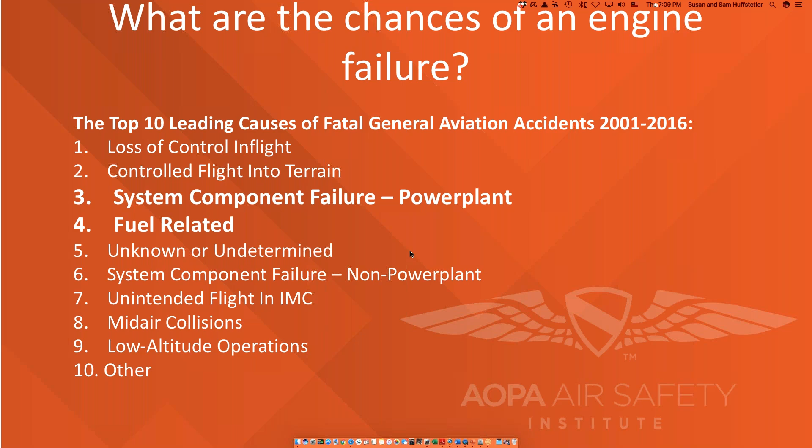Now, we always want to make sure we stay away from running out of fuel, because there just aren't enough words in the English language to describe why you ran out of fuel. So let's put that to bed and talk more about what happens when you lose that engine. Again, how often does this happen?

Well, this comes from the 2019 NALL report, which looks at aircraft accidents through about 2016. As you can see, about 72% of all accidents are pilot related, but about 18% of accidents are mechanical or unknown. Our fuel and power plant failures are listed in that 17.9% mechanical number.

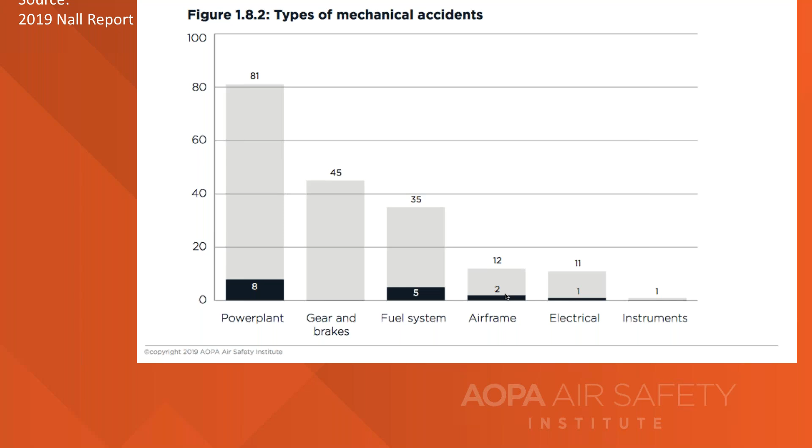Let's go back and look a little more in depth. Again, from the NALL report, we look at the types of mechanical accidents, and under power plant we have about 81, and the fuel system about 35. Put those together, and out of 1,214 accidents in 2016, about 116 were due to power plant or fuel system issues. That's about 9.5% of all accidents.

Now, the reason it's very difficult to come up with these numbers is that not all engine failures are reported. They do not meet NTSB Part 830 reporting requirements unless there is substantial damage to the aircraft, a personal injury, or if it's requested by the NTSB.

So that's one reason we're looking at this poll, to see just how many people of this group have had these accidents. Now, on this slide you also see the ATSB acronym, which stands for the Australian Transport Safety Bureau.

They do a lot of research on aircraft safety, and their numbers in 2016 came up with basically 13 failures per 100,000 flight hours within the Lycoming and Continental grouping of engines, 15 per 100,000 for the Rotax. If you fly experimental aircraft, you're familiar with the Jabiru engines—they have a much higher failure rate. I don't have that number on screen, but it approaches 30 per 100,000 flight hours.

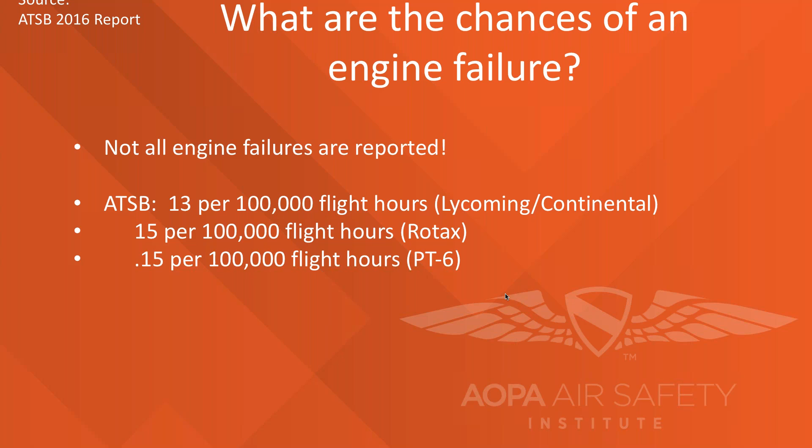But if you're happy and lucky enough to fly behind a PT6, it's bulletproof—the thing only fails 0.15 times per 100,000 flight hours. So if you have about 800,000 dollars, you're in good shape, you can go buy a PT6.

So what happens when you do have that engine failure? Well, it is human nature to be startled, and there is absolutely nothing you can do to train yourself away from that startle response. You can train what happens after it, but that startle response will stay with you regardless of how much you try to plan for it.

It's really interesting that when I was doing research for this project, I went through the NASA databases, and they have a ton of research on the effects of sound and sudden sound on astronauts and how that causes stress and startle responses. In our case, it's the lack of sound—that engine has gone to pot, you have no engine noise in front of you, and now you've got to deal with it.

I found this quote within the NASA study on response times very interesting: if you've been conditioned during training to expect to find a good landing area, and you startle yourself with an engine failure, you are now startled as you approach the emergency process, and you're very likely to ignore all the airmanship you've ever learned to avoid aircraft damage. And aircraft damage really is very likely.

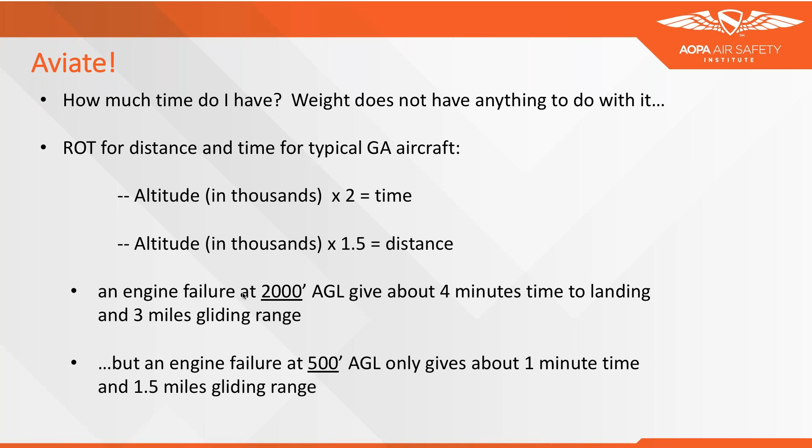And keep in mind that while you might have 5 minutes of time while you're gliding, that last minute is going to be filled with aviating. You're not going to have a whole lot of mental bandwidth in that last minute to do very much other than concentrate on your landing area and make sure that you land correctly.

Most aircraft flight manuals or pilot operating handbooks have these charts, and they simply show a quick illustration of what we were just talking about in terms of your altitude and the amount of distance that you can glide and the time that you might have. Your particular aircraft may have a slightly different glide ratio, which is why you want to take a look in that chart.

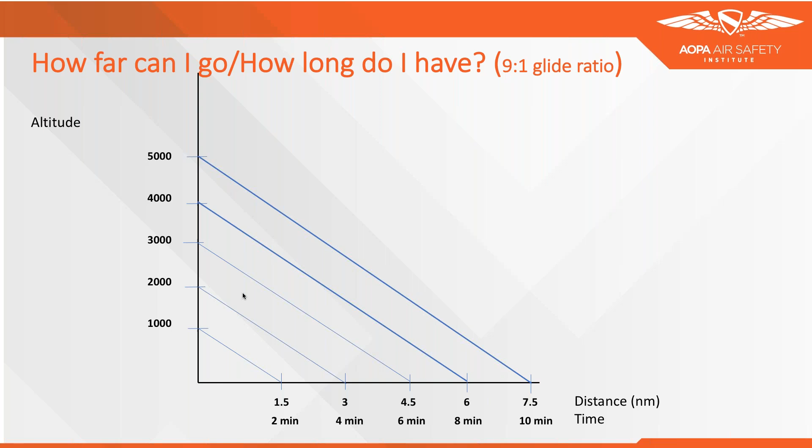So what happens if you don't have much time? I teach my students that if you have 1,000 feet of altitude or less below your fanny, then it's time to concentrate on landing the aircraft. So again, you're going to pitch for that best glide speed and trim the aircraft.

You're going to pick out that best landing site and stick with it. You need to stick with that landing site because changing it puts in too many variables. You don't have many engine restart options available because of the time. If you have some extra bandwidth, you might be able to swap tanks or turn on a fuel pump, or throw on carb heat, but otherwise your basic option is to secure yourself and the passengers. Maybe communicate a quick mayday if possible on the frequency you're on, and then, critically, before you touch down on any surface, slow down to a reasonable but minimum controllable airspeed prior to touchdown.

Okay, what happens if I'm above 1,000 feet? In this case, I have time and brain cells available, and I'm able to figure things out. I'm going to pitch and trim the aircraft for the best glide possible, take a preliminary look to see where I can put the aircraft down, and turn in that direction. I'm going to use my visual acuity or the nearest function on my avionics to determine where I might be able to take the aircraft and see if there's a runway somewhere close. In this case, you might also need to throw in a Mayday call and advise ATC of your problem before you go through the restart process.

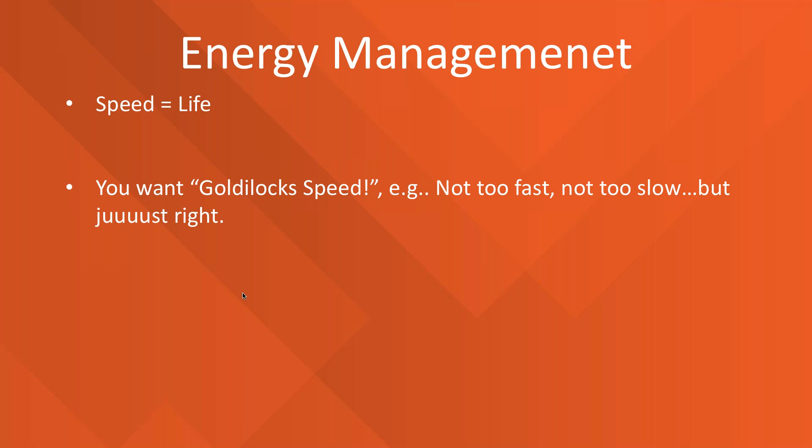Now, we talked about landing under control, and in my previous life as a fighter pilot, we used to say speed is life, because you had to have a certain amount of speed to fly the airplane against the opponent and maintain your energy. In our case, you want the perfect speed that allows you to land at just over your minimum controllable airspeed, so you can dissipate your energy in a very controllable fashion.

So your best glide speed, once you have an engine failure, is not your best impact speed. It is the best speed that will give you the best distance while descending without power. So if you slow down, that's not going to make you go further toward another airport.

It's merely going to slow your descent, but you'll go a lesser distance. Now, how heavy you are also does not determine how far you go. It does determine your angle of attack, and more likely your actual best glide speed.

Most of us use a single speed to determine your best glide speed. So for all practical purposes, let's just drop weight out of the consideration, except to know that weight does impact stall speed. We'll talk about stall speed and its relationship to your touchdown speed in just a moment. You should know what your minimum controllable airspeed is above a stall with the power off. If you don't know that, go out and practice it next time.

You need to know that when your speed is doubled, your energy is quadrupled. So what this means really is that your total energy that has to be dissipated by your aircraft and by your bodies inside that aircraft is a function of the square of your airspeed.

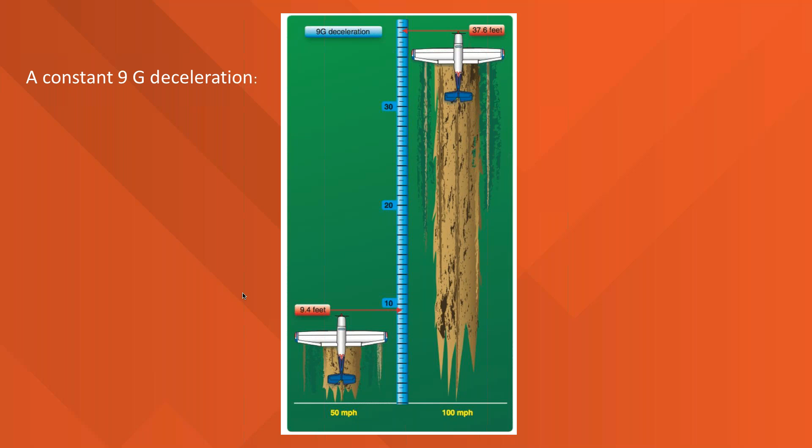So what does this really mean? It means that if you are in a 172 and the aircraft is gliding at 65, but it stalls at 50, let's assume you're going to slow to 55 before you touch the trees or the bushes or just the grass out there. If you slow down to 55 knots, it reduces your overall energy by 28% than if you were still maintaining 65 knots.

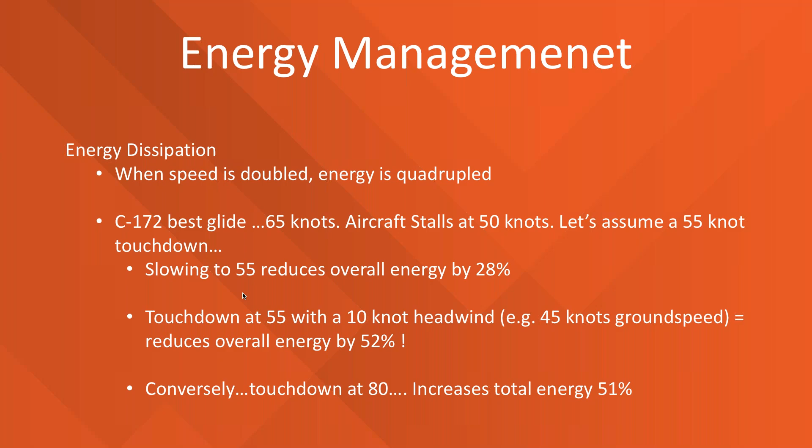So if you touch down at 55 knots with a 10 knot headwind, which is easy to see, that gives you a 45 knot ground speed. It reduces that total energy by 52% from that 65 knot no-wind glide. Now, the other way is if you touch down at 80, maybe downwind, maybe a little fast, that increases your total energy by half, and that is unacceptable.

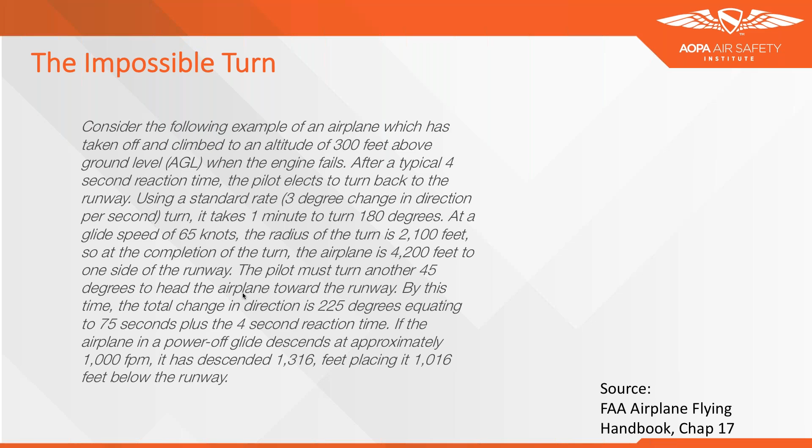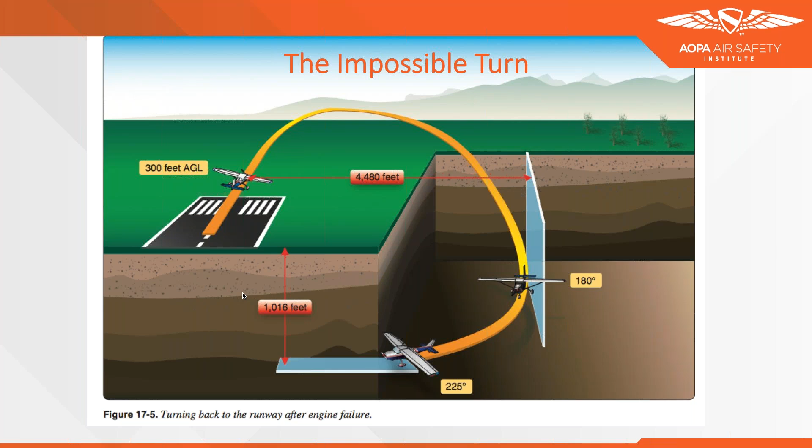Here's the description from the FAA Airplane Flying Handbook, and it's a little laborious, but essentially it means that if your engine fails at 300 feet above the ground, after a 4-second startle time, the pilot elects to turn back using a standard rate turn. Well, if he does this, the aircraft descends without power and impacts the ground before you ever make the 180-degree mark. So that impossible turn, under those conditions, would lead to tragedy. But clearly, there is an altitude and an airspeed from which you may elect to return to the airport.

So what's the turn radius at other bank angles other than a standard rate turn? How much turn is required to get back there? And how much time does it take? Well, let's take a look at that.

Now, I ran the numbers, and I'm not going to go through the math in public here, but at a 30-degree bank, it gives you a 650 foot turn radius, and it gives you a turn rate of about 10 degrees per second. And it takes, as you see, 24 seconds to turn back 240 degrees. As you saw from that last slide, if you turn 180 degrees in this situation, you're not going to make it back to the airport environment. You have to turn further than 180 degrees to actually make it back to either the runway or the clear areas surrounding the runways at an airport.

If you go to 45 degrees bank, the radius obviously decreases. Again, not quite a linear function, but it's about two-thirds of what you had at a 30-degree bank.

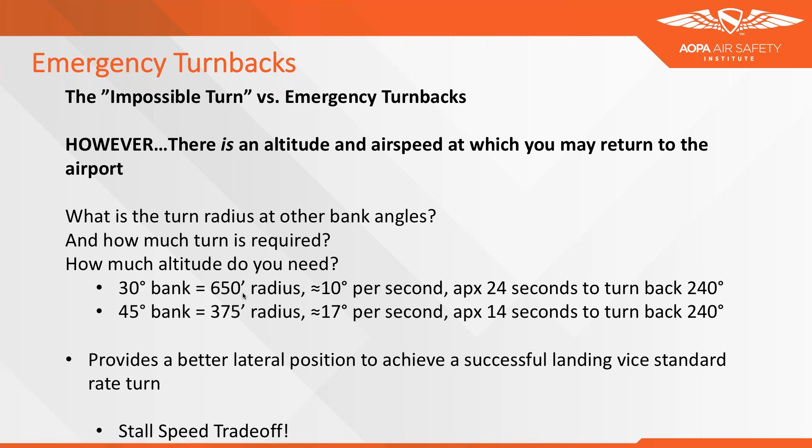And it gives you a possibility of getting back to that airport. Remember, at 30 degrees of bank and 160 knots, a 747 is going to have the very same turn radius as an RV-6. So this is not aircraft dependent, it's just dependent on your angle of bank and your airspeed. So we know that altitude and speed are critical.

So really, what angle of bank and airspeed should you use for this emergency turnback? Well, we thought about the angle of bank, but what's going to happen to your airspeed with that increased angle of bank? Now, no math in public, but the stall speed increases by the square root of the load factor. So if you're in a 30-degree bank, you're looking at increasing your stall speed only incrementally, going from 50 to 53 knots, assuming a 50-knot stall speed.

If you go to a 45-degree bank, your load factor increases, so your actual stall speed in a level turn goes up to 60 knots. With the best glide speed of 65, you're getting kind of close to your stall speed, but it's doable. However, if you go to a 60-degree bank, the stall speed goes up to 71 knots, which is clearly not a good plan for any of us because it's well above your best glide speed. So you would have to compensate by staying faster, which of course would mean you're descending faster too.

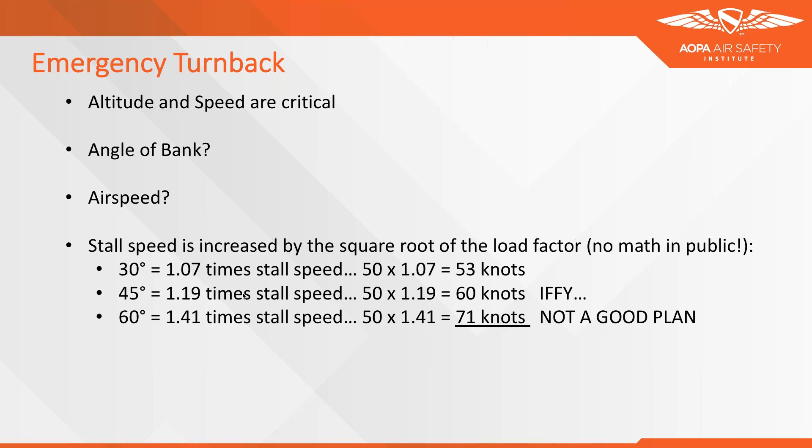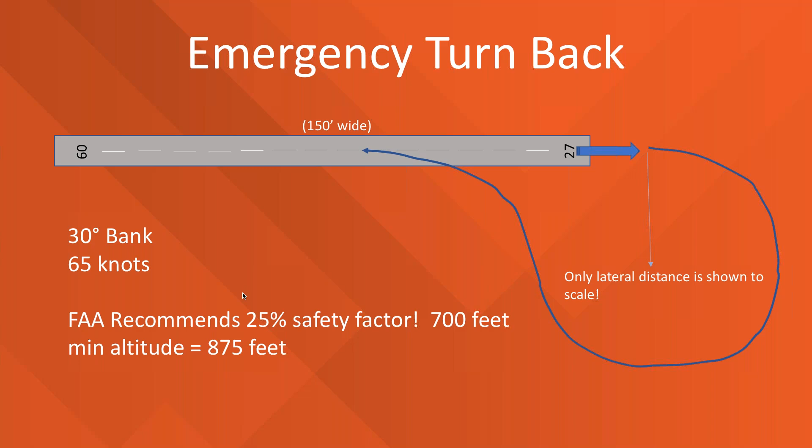Now, the FAA recommends that when you do these emergency turnbacks, you have a 25% fudge factor, a safety factor. So this turnback at 700 feet really should be accomplished at 875 feet to give yourself a little bit of slop and be able to get back to that airport. I ran the numbers also for 45 degrees of bank and 65 knots, and those turn circles and turn radius actually kept you over the clear area just to the south of that runway 7 at the Newport News Airport.

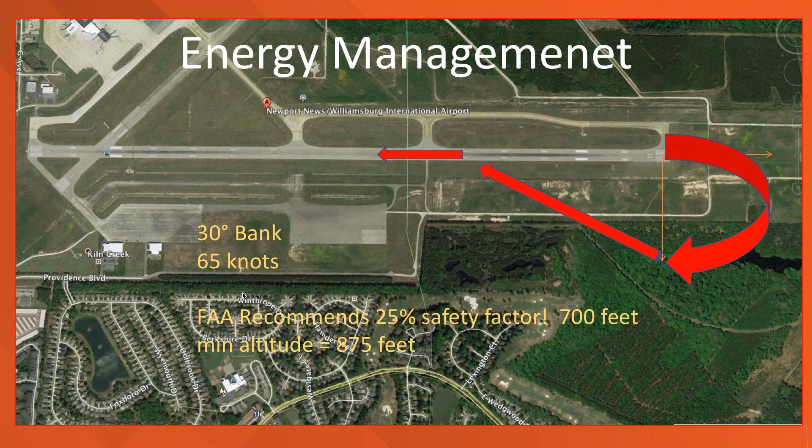Now, we talked about crash survivability earlier, but let's talk about the major factors that are going to play into keeping you safe there. These are all simple, common sense elements, but they have to be remembered. You've got to remember and practice these to be able to actually go do this if you have an emergency.

So the touchdown speed is the very first thing that you have to remember for the reasons we just explained. Now, wings level. Wings level is very important, especially if you land on some other obstruction such as brush or trees, because that way the aircraft structure will symmetrically accept the deceleration and not cartwheel the aircraft. We'll talk about fire potential here in just a few moments, but it is important that before you touch down, you probably do need to turn off your master and your mags.

The fire potential numbers are substantial in terms of fatalities, but fire only happens in about 4% of all forced landings. They do figure in 22% of the fatalities. So it is important to try to slow the aircraft down and turn off those ignition sources.

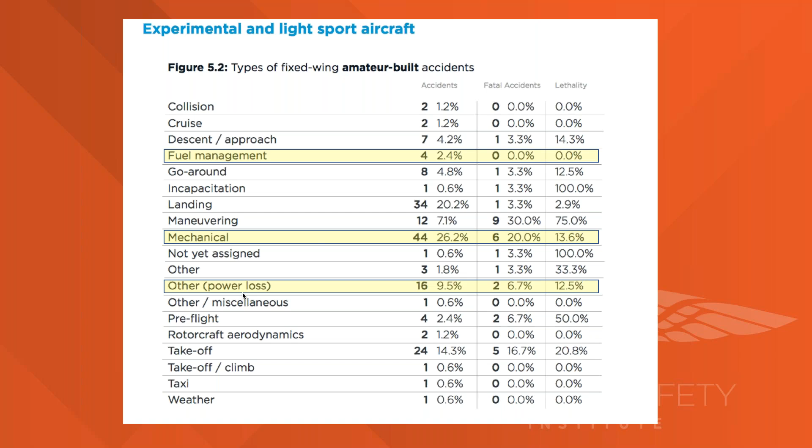This is an experimental category chart, but the normal category aircraft also have similar numbers out here. If you take a look at day VMC numbers, the number of fatal accidents for mechanical accidents is only 8.6%. Night VMC, wow, only 12.5% of those are fatal. So you have about an 87 to 88% chance of surviving a night VMC engine failure.

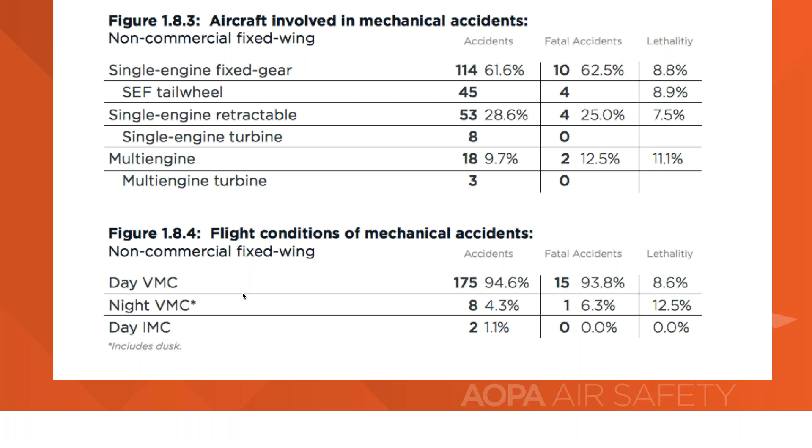Those are tremendous numbers. The odds are in your favor in this case. So what are we going to do in terms of landing on land?

We mentioned earlier issues about furrows and power lines, knowing that all roads have wires. Remember that interstates do have overpasses, signs, and electrical power lines as well as vehicles. You need to decide whether you want to land with or against traffic. Most of the successful landings I've seen anecdotally via video have been with aircraft landing with the vehicles.

Even if the wind was not perfectly on its nose. In most cases, you want to have the flaps fully deployed to give yourself the greatest lift and the ability to land at a slow, controllable speed. If you have a retractable gear airplane, in most cases roads and hard surfaces provide the best option for leaving the gear down.

Again, water or wet surfaces means you probably want to leave the gear up. You do want to consider the length of the field you want to land on and the state of the vegetation. Corn and other tall vegetation will slow your aircraft down quite rapidly. You do want to have an aim point, and that aim point for any open field ought to be 1/3 to 1/2 down the length of that field. That will give you the option of undershooting or overshooting that field.

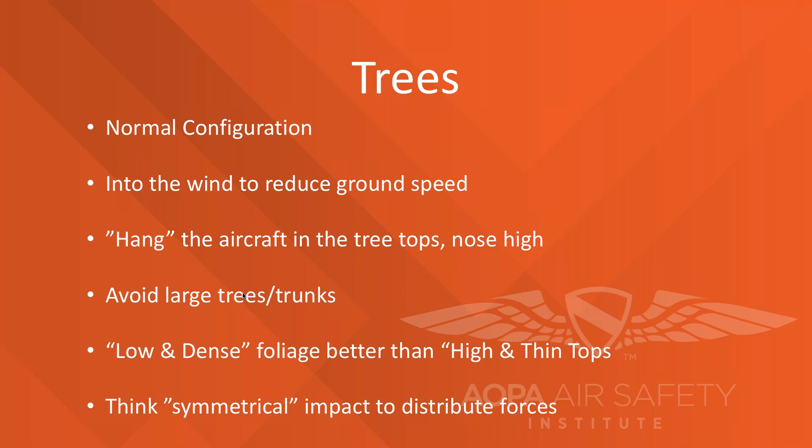Water. Everybody fears water. I would never want to do a water landing, but I will tell you that a water landing will typically have initial impact forces that are less than what you have on land. The second impact is typically a little more hard, with a quick deceleration.

Again, the symmetrical touchdown is always best, but the FAA recommends you do not put down full flaps when landing in the water, because upon first contact with the water, one of those flaps may be damaged, causing the aircraft to go out of control and hit the water in an asymmetrical way. So limit your flap extension.

You do want to land parallel to the swells, not necessarily into the wind. This is about the only case where you do not want to land directly into the wind to reduce your energy, because if you land parallel to the swells, it's more likely that your deceleration will be normal.

Now, the FAA says that aircraft normally float initially. I have not seen that from my anecdotal research, but I will tell you that we do know fixed gear aircraft are susceptible to flipping. However, fixed gear aircraft are very successful in ditching. The number of lethal incidents for fixed gear aircraft is actually pretty low, around 22%.

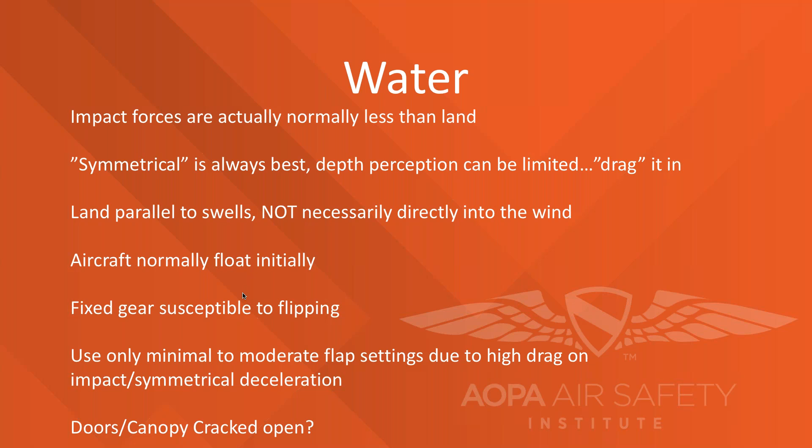You'll need to read your aircraft manual to determine whether you want to leave the doors or canopy cracked open, because sometimes manufacturers make these doors and canopies an integral part of the aircraft structure. So think that one through by reading through your own manual. You may also want to invest in a cheap canopy or windscreen cracking or breaking tool. They can be had for $15 and would give you a very good option for getting out of that aircraft.

Night and IMC is a fearsome time to have an engine failure, but again, you're going to maintain aircraft control. You're going to slow to your best glide and trim that aircraft to maintain that glide. Take a couple of breaths, turn the lights on. Now start using your available resources. You probably are in touch with ATC—use them. Use your nearest airport function or terrain function on that GPS to be able to find a place that you can go land.

Lighted areas are generally cities, and they may not be a good place to put your aircraft down, because they consist of houses, power lines, and the like. The dark areas are probably where you want to head towards. If you know there's open land there, of course you're going to head that way. But most of us are not that lucky.

If you know there's water out there, frankly, a water ditching is probably preferable to landing in a major metropolitan area. Again, the night survivability numbers are actually pretty high. Night VMC fatalities are about 27%. My number was wrong earlier, but that means you have about a 73% chance of surviving that night IMC encounter with an engine failure. Again, those are really good odds for you.

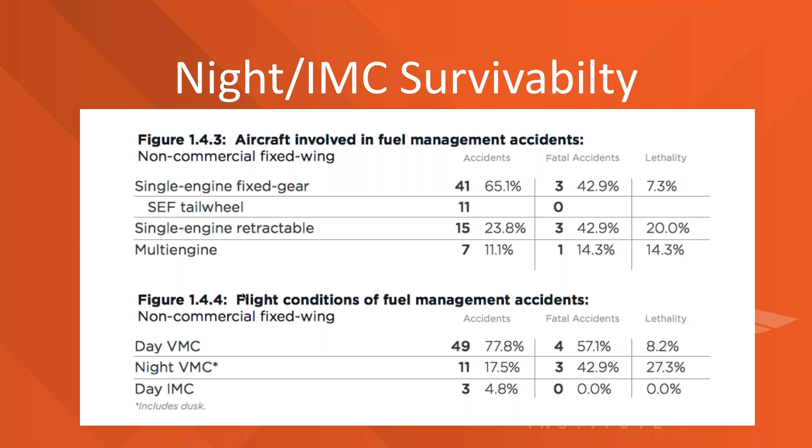The NTSB doesn't have a lot of numbers in terms of post-impact fire. However, there were good numbers that came out of the Canadians. They discovered that post-impact fire numbers, as I stated earlier, were about only 4% of overall crashes. However, they did result in 22% of the overall fatalities that happen in aircraft accidents in Canada. So reducing the chances is a pretty doggone important thing for you there.

So shutting off your fuel, turning off your mags, turning off your master are all good things to remember. And remember that smoke is the real killer if you do have a fire. Getting out of the aircraft as soon as possible is important. If you have a halon fire extinguisher, immediately after the aircraft comes to a halt, throw that halon onto the fire behind the panel or wherever you see it, and that extinguisher makes a very good battering ram to knock out windows and get your exits to open.

So we talk about the possibilities of being found after you're on the ground. The USAF Rescue Coordination Center is based down in Florida, and they help coordinate the efforts of all the assets, including the CAP. The CAP has the largest fleet of civilian aircraft in the world, about 560 airplanes, and over 30,000 volunteers. They also have a tremendous capability when it comes to search and rescue.

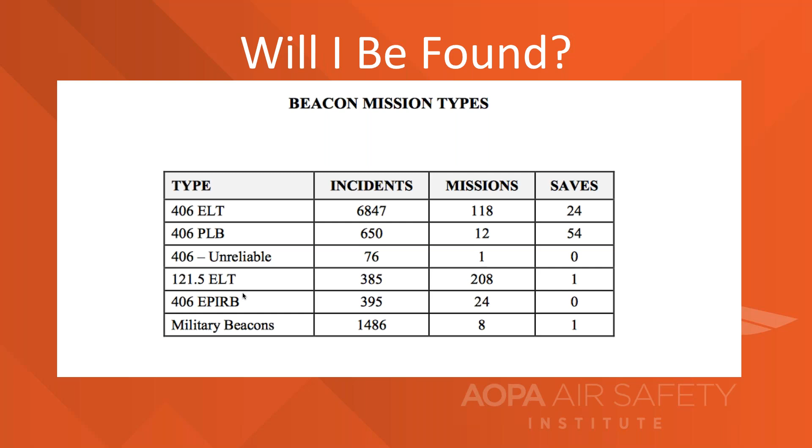Think about it: a 121.5 beacon with that kind of accuracy gives about a 780 square mile area for search. But the 406 beacon with a 30-meter precision GPS accuracy, they're going to come find you very quickly out there.

So let's talk about the basics here of what I tried to cover tonight. Prevention is vital in that you need to make sure you do the maintenance on the aircraft and keep enough gas in it, and know how to get to the fuel from your fuel tanks so you don't run out of gas. Make it a rule, a good technique, to land with 1 hour of fuel on every flight. Just don't push it to 30 or 45 minutes.

If you have a problem, you're going to follow those 3 rules: aviate, navigate, and communicate, in that order. Now that we've talked about it, I wish that you would go through and have a plan and go out the next time you fly and actually practice it. Go up to about 4,000 or 5,000 feet and give yourself an engine failure. Well, let's simulate it instead.